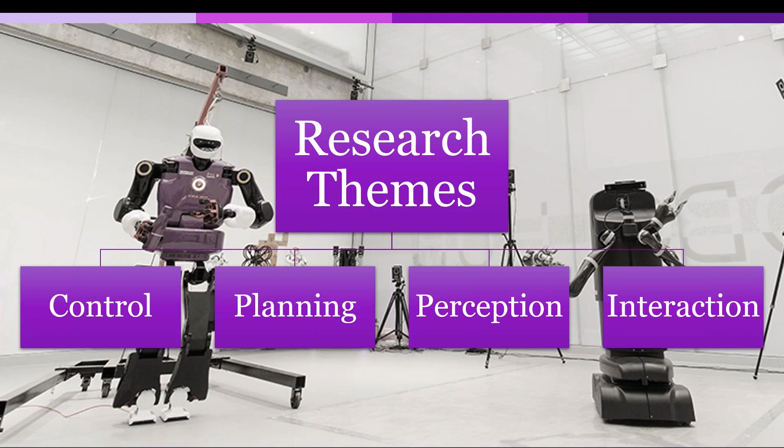So those 4 pieces are kind of our core pillars that hold everything else up. And in order to look at these types of questions, we actually have acquired a globally unique fleet of over 30 robots. So as you can iconically see here, we have humanoids, arms and legs, we have fixed base arms, we have flying drones of various sizes and scales, we have autonomous vehicles, both indoor and outdoor, and various combinations thereof.

So mobile manipulators with 2 arms, mobile manipulators with 1 arm. Some of our drones have multiple sensor suites on them and coordinate with ground platforms to charge, things like that. So a very interesting set of tools that we can use to look at all of these various bits and pieces. So I'm going to quickly go through a few of those.

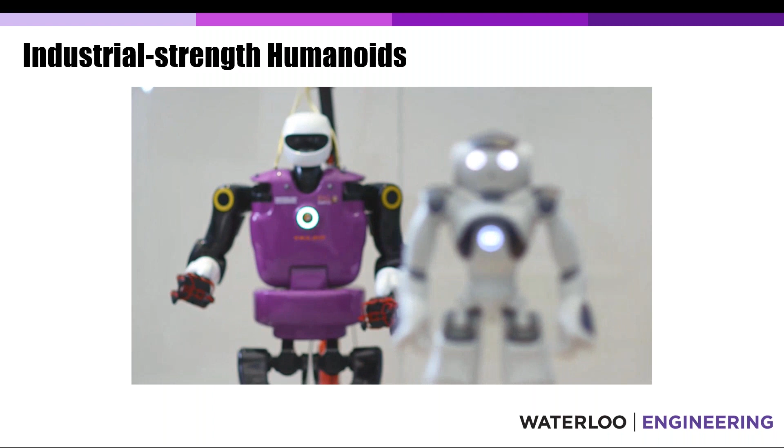First off, we have obviously the smaller kind of human interaction, social interaction robots on the humanoid side, but we also have industrial strength humanoids like the Talos at the back here.

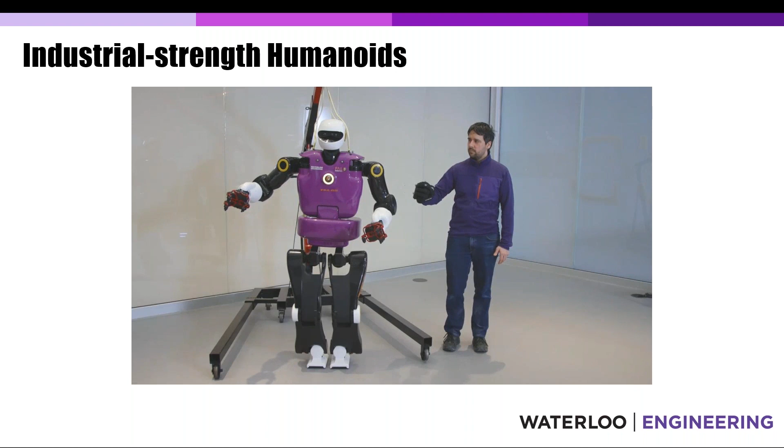And we're looking at a lot of different things to augment humans. So carrying something with a human - in this case there's no actual perception going on. All of the responses with the table are based on torque sensors in the elbows and arms. It wasn't actually watching Alex, our humanoid specialist, to see what he was doing. It was only paying attention to how the table was moving.

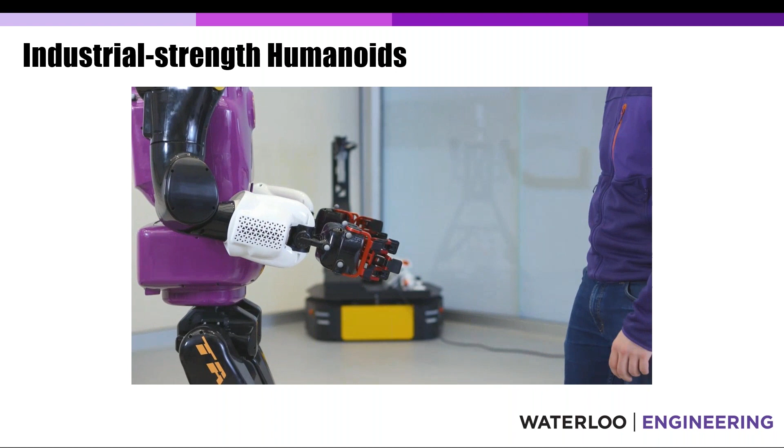The compliance you can see there is enabled by the torque sensors in the arm and upper body, so it can fully balance using a lower body controller, distinct from an upper body, softer controller, where it's only trying to spring its hands back to a particular location relative to its body, as opposed to rigidly holding them firm. That gives you a bit of that collaborative safety, and it effectively gives the robot a sense of feel.

So it doesn't have touch necessarily, like it's not coated in skin or anything, although that can be done, but it does have an idea of how hard it's pushing on the world, on people, and how hard they are pushing on it.

One of the reasons we use the small humanoid robots is to map some of the social aspects and human interaction aspects on the small robots, where we can test it and it doesn't really matter if something breaks or it swings its arms around. It's not really going to hurt anybody - it can't hurt anybody. And we can map those human interaction lessons we learn up onto the bigger systems.

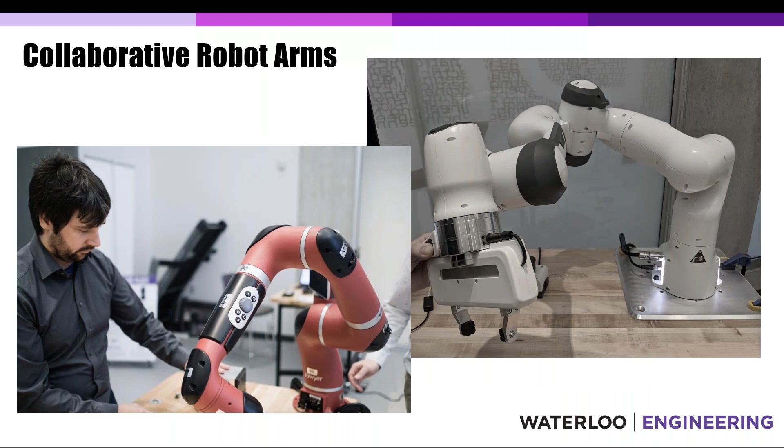Like this one. The next piece is the collaborative robot arms. Here we can see a couple of them - the Franka Emika Panda on the right and the Sawyer on the left, which has been bought from Rethink by HAHN. But really the similarities here - and we have several other fixed base collaborative arms as well.

The big thing is that they have those similar torque sensors, or in the case of the Sawyer, series elastic actuators, so that they know how hard people are pushing on them, and how hard they're pushing on the world.

You can see there's actually a hand on the Panda on the right there, guiding it, so you can actually teach it by dragging it through a set of poses and using buttons on the robot itself to teach it, much like the buttons that are on the Sawyer on the left as well. So you don't actually need to be a robotics expert to teach these robots whatever task you want them to do.

You can bolt it to the table, teach it a task, it can do that 100 times, and then you teach it something else. And you can adjust that using a super simple tablet interface right out of the box.

And then for all of these systems, you can also go deeper and deeper as needed to satisfy the educational and research needs of the students, professors, lecturers and everybody involved with these systems. So you can have that initial human interface, which is relatively simple for someone who wants to treat this as a tool that gets planted on your desk, using it to do the dull, dirty, dangerous, boring, repetitive pieces of a particular task.

So you're effectively treating it as just another tool in the toolbox. And then if you get further into the education side, you can look at how are they doing that, how do we modify that. These are redundant robots, so they have more degrees of freedom than they need, more joints than they need - so how do you figure out what to do with that extra motion freedom?

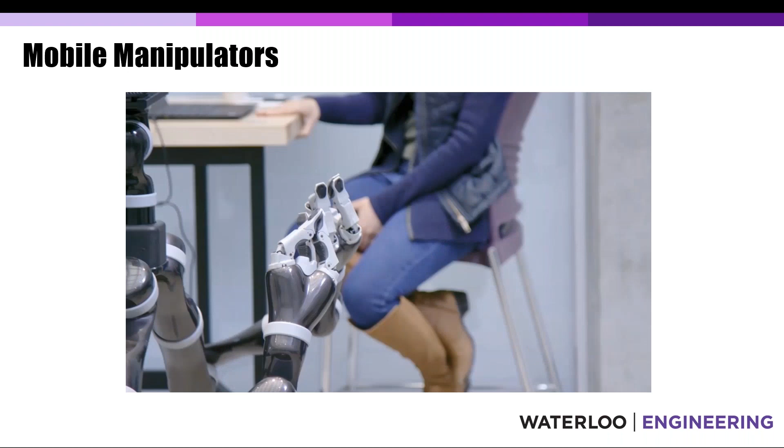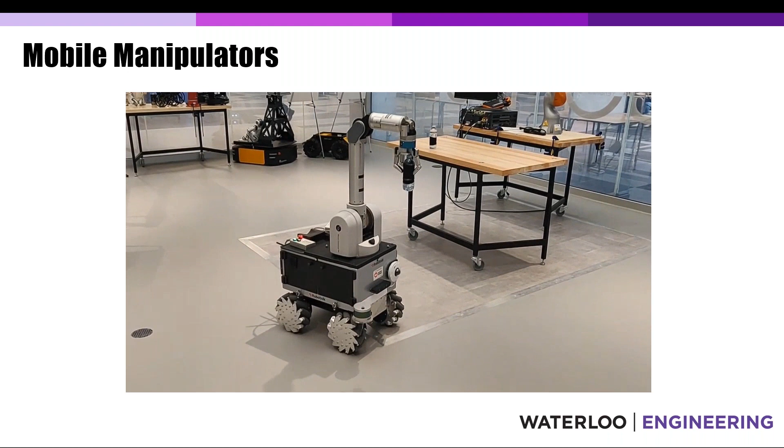Combining that a little bit, you can get collaborative arms and actually mount them to a mobile manipulator, like these two systems, where you can have different types of systems, different types of arms, two arms or one arm, sensing, potentially there's a camera on board, or in this case there's a remote camera, telling it where and how those things are being connected together.

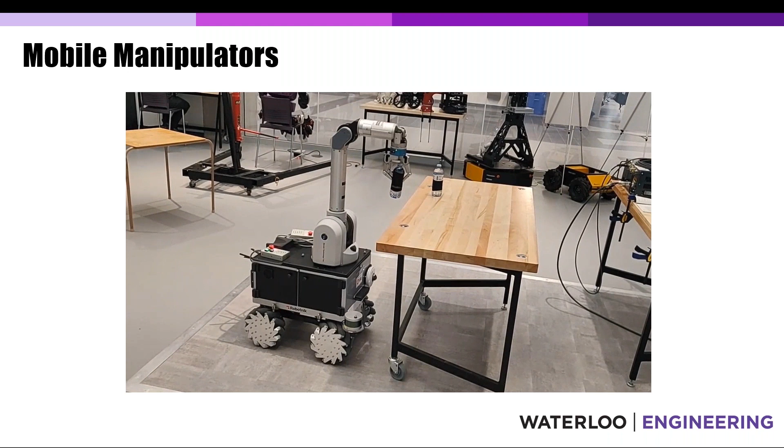These will enable you to take those collaborative arms and some of the lessons learned there with having it bolted to a table, and then apply that to, okay, well now you have a vehicle that is capable of moving throughout a space. So what challenges does that impose? What benefits do you get out of that?

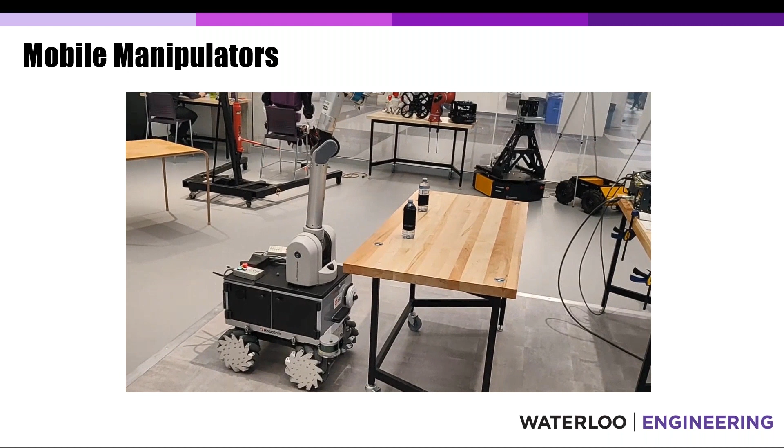There's many different aspects to this. There's the sensory part, the perception part of where is the table, where is the robot, how is the arm moving. There's also the controls piece, trying to unify the controls for the mobile base compared to the arm.

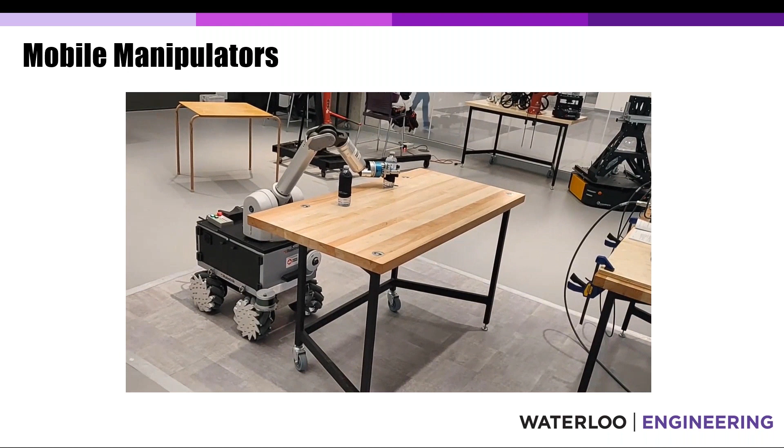And figuring out, obviously this isn't interacting with humans, but if you have an arm on a mobile base, like the Movo, the black one that you saw first, how does that interaction actually work? What does the interface look like? Is it voice? Is it a tablet? Do you have a keyboard somewhere, and that is how you're actually controlling and interacting with it?

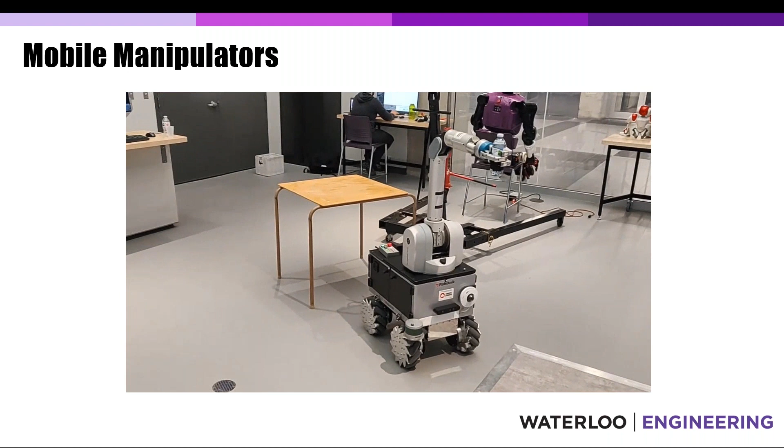Because all of those things will change what kind of sensor modalities you need, what kind of background you need to actually program a system like that, and how many layers and what kinds of layers of safety and control that you need to make those kinds of things work.

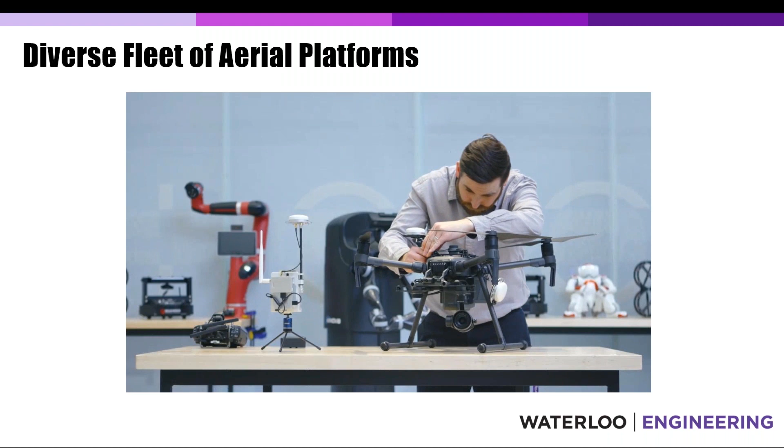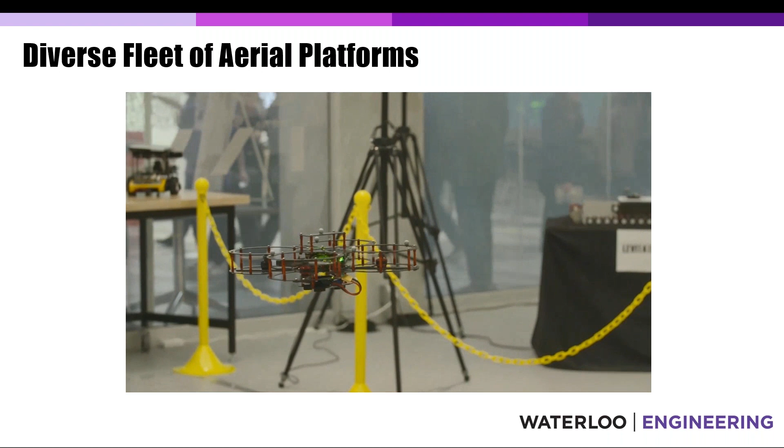So moving on from the mobile manipulator side of things, we also have a relatively diverse set of aerial platforms. So we have an outdoor system that you saw me adjusting the camera on there, and we have several of those, and we also have several of these Quanser Q drones, which allow us to do a lot of nice indoor research, multiple platforms.

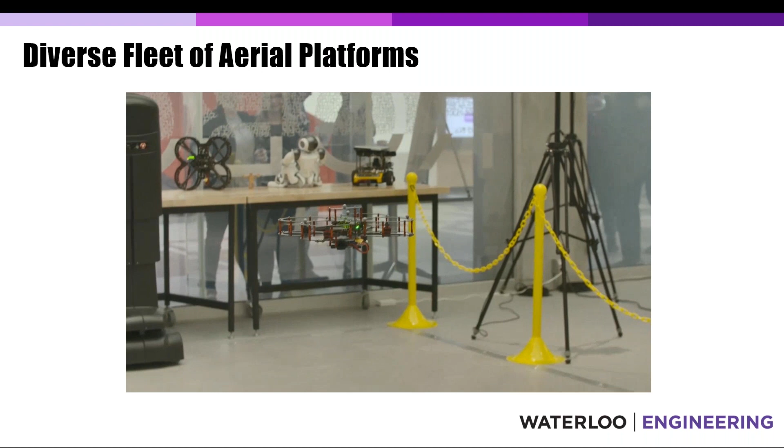We can combine them with ground vehicles, and right out of the box, they work well with their kind of paired ground systems. So we can have them follow each other as it's doing here. We can have one drive the other. We can have all of them be autonomous.

And we can look at those kinds of systems. We can have multiple ground platforms, multiple aerial platforms, and generate algorithms and equations and planners and all those kinds of things for these systems that are indoors, and then map those to maybe bigger outdoor systems, for example.

And you can look at things like when you're in a GPS denied environment with an outdoor drone, how does that work? Maybe you have a base station on a big mobile system, like we'll see in the next slide, which can carry your power. It can carry a GPS base station or an ultra wideband localization system, something like that.

So then the drone only needs to know where it is relative to a ground platform. And the ground platform, if it loses GPS, it knows that it hasn't left the ground, for example. It's not going to fall out of the sky when it loses GPS. It'll just stay where it is or try to find GPS again.

So you can use the strengths and benefits of the different platforms together, because we have all of these various types of systems at the RoboHub, to combine and extend the capabilities that you would have with only one or two of these systems. And we can map, much like we can map things from the small humanoids up to the big Talos, we can map from these Q drones and Q bots, relatively simple to use, very reliable kind of education systems, Q-bot and Q-drone, to bigger systems, outdoor systems, more systems, all of those kinds of things.

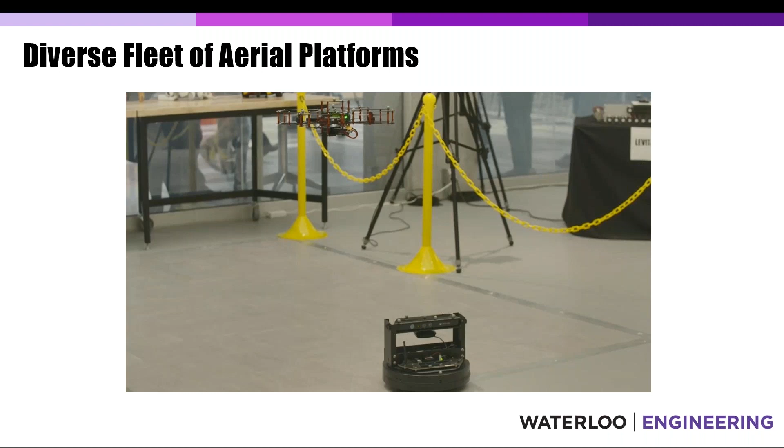We actually use these systems to both upscale some of the algorithms that we run inside, and to do a little bit more of the general kind of dirty or dangerous work that we can look at outside. We can simulate those kinds of things or actually do them outside, because these are fairly rugged systems.

The vast majority of the systems that we have all run on the robot operating system, ROS. So because they have that common middleware, generally they can all talk to each other. You can run the same planner on multiple scales of system, things like that.

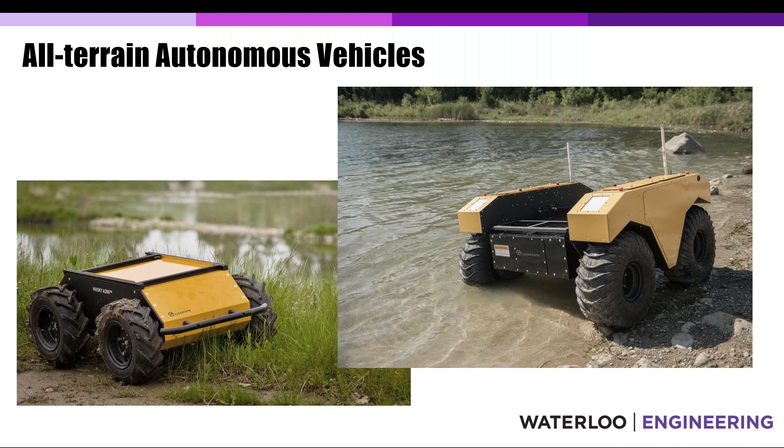I'll move a little bit to a slightly different topic here. One of the unique things about the RoboHub is that we have Professor Behrad Khamesee here on campus.

He is a world expert on magnetic levitation systems, specifically not like a maglev train where it's very much linear, with one track it travels along, but actually in 3D localization, 3D motion, 3D levitation of initially micromagnetic robots, and now this platform here is a little bit larger. I'll give you a few details on that.

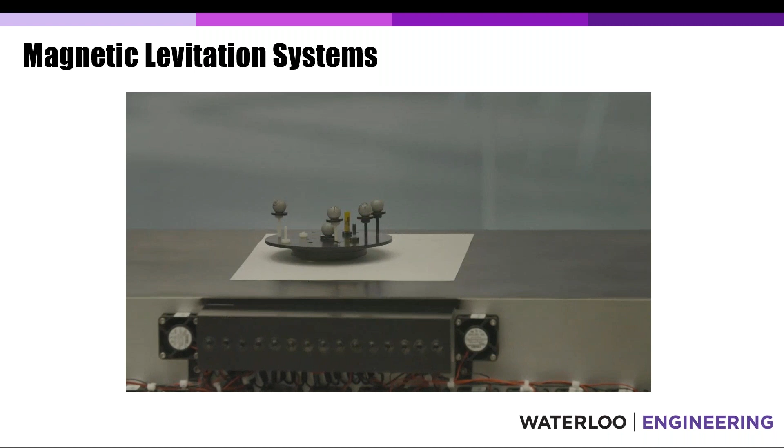This is basically a magnetic table, approximately 2 by 3 feet. There are several different types of modules that we have for this. The first one you saw was just purely capable of lifting up and down, with only one permanent magnet. This one on the right has 3 different permanent magnets, so we can actually control the position and the orientation, roll, pitch, yaw, fully with this system.

I'm not going to go through all the details here, but basically the applications for this size of system are for clean room manipulation, things like that, because there are no moving parts where the actual module is. So within this levitation space, within the volume, there's no moving parts, there's no need for grease, and there's never going to be rust, unless you're introducing those in another way.

So effectively you can create a confined clean room and use this to do 6 degrees of freedom, full 3D manipulation of an object, or multiple objects, as needed. You could also put it in a wind tunnel, obviously, because there's no support system for this.

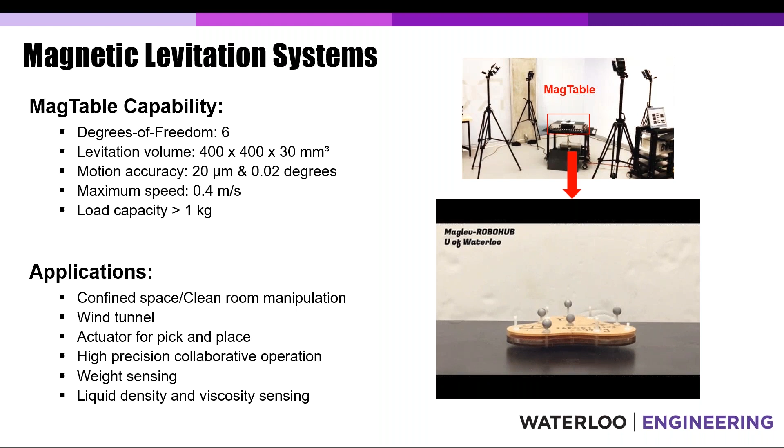You could actually look at what the forces are, because you can measure that based on the magnetics, pick and place, collaborative operation, etc. Since it's just permanent magnets in here, you could have a liquid and use the motion of the module itself to measure. So you can use this maglev module as a sensor, looking at weights, density, viscosity, and things like that.

We can also have multiple platforms running at the same time. Because we have individually controlled electromagnets underneath the floor, they can move around independently or do coordinated tasks. Here they're being treated as simple floating systems, but you could do any number of different things with this—reasonable load capacity of 5 kilograms, and moving at a relatively good speed.

This larger system will be the only one of its kind, since it's being developed and created here on campus, specifically for our space. It enables flexible manufacturing, like shown here. You can use it to carry things in a warehouse if the magnetic volume gets longer or bigger, and you can do clean room manipulation, confined space manipulation, and many of the things the smaller table is capable of, obviously on a bigger scale.

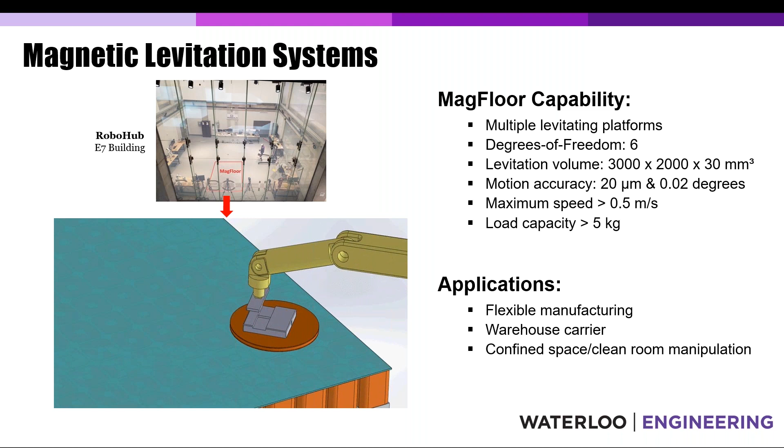It's a bit more challenging because with the bigger table, your resolution on the magnetic field gets a little lower, obviously, but the accuracy and positioning and those things are relatively the same. If you want to scale up, it's basically just a matter of cost in terms of how many amplifiers and electromagnets you want. They're really just analog systems where you can define how strong you want the field in any particular electromagnet, and then have platforms you localize using whatever system you want—video, an indoor positioning system, or anything else.

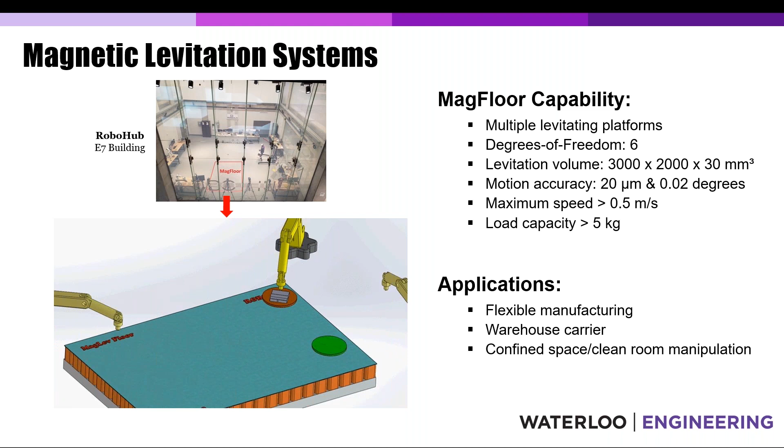Getting to the outside level, in the RoboHub we also have a few things that enable us to do interesting work on humanoid gait and measurement, validation of sensors, testing of external robots, and all those kinds of things. The big main one is that we have an advanced Vicon IPS, which can also be used as a motion capture system.

We currently have 24 cameras, and we're hoping to approximately double that, maybe not fully double, because we also want to put a set on the ceiling so we can use our full volume for collaborative flight and swarm flight research.

In tandem with this, we have a control center used for real-time fleet management and visualization—a lot of visual feedback, details on what kind of messages are passing, what the latency is, and so on, so you can analyze a lot of the network side of things. We also have a VNA, so you can look specifically at wireless information, density, bandwidth, and all that.

The windows in the RoboHub are actually privacy glass, so at the flick of a switch we can turn off all the windows. Instead of a showcase space where you can watch research happening in real time and see the robots moving around, you can turn it off if there's a confidential project, or if you want to create an artificial environment, because once the windows are nominally turned off, you can use them as a projection surface.

So you can project an artificial environment, sensor data, or information for the people or the robots. We're also looking at getting augmented reality and virtual reality components in the space, so people can see what the shared map might look like. If multiple robots are collaborating and building a map together, you can pop on something like a HoloLens and look through it to see what the actual robot's map looks like and understand why they're running into an obstacle.

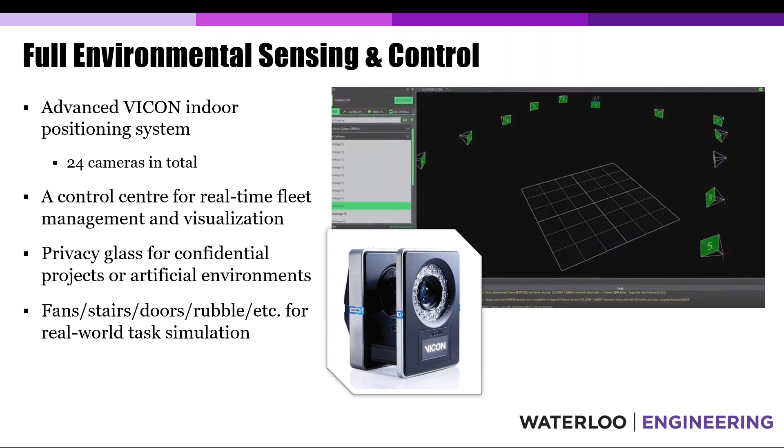One of the big emphasis pieces we have is trying to look at real world problems and find the solutions, and then pass that along through courses, through workshops, etc., to the students that are coming in, the grad students, etc.

The last piece I'll mention is that because the vast majority of our robots are based on ROS, the robot operating system that I mentioned, we also have an initial version of a multi-master network in development, and we're debating right now how we should do that for robots that are not actually running ROS. So whether we use something like Quark as a backend to hook all of them together, and then that produces ROS nodes for those various things, like the maglev system that we're defining, or if we go to a model like ROS2, where you can have multiple systems and you don't necessarily need a master, they can talk to each other, etc. So we're actively working on that right now.

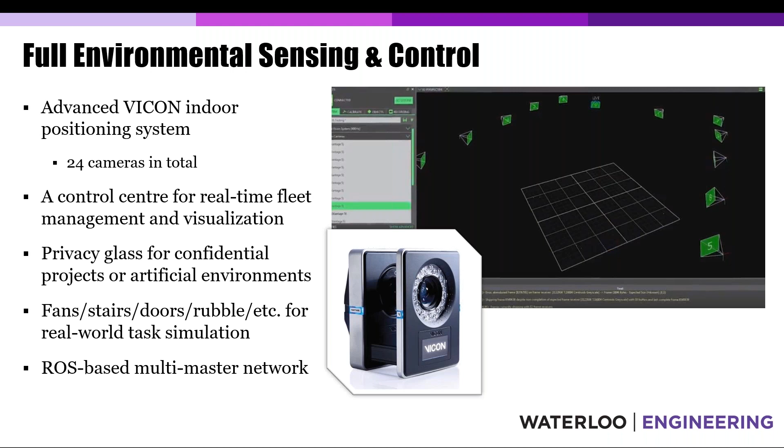And if any of you are actively working on that, we would be very interested in working with you on that aspect. With that, I think I will close up and say, if you have any questions, please send your questions through the webinar's questions page.